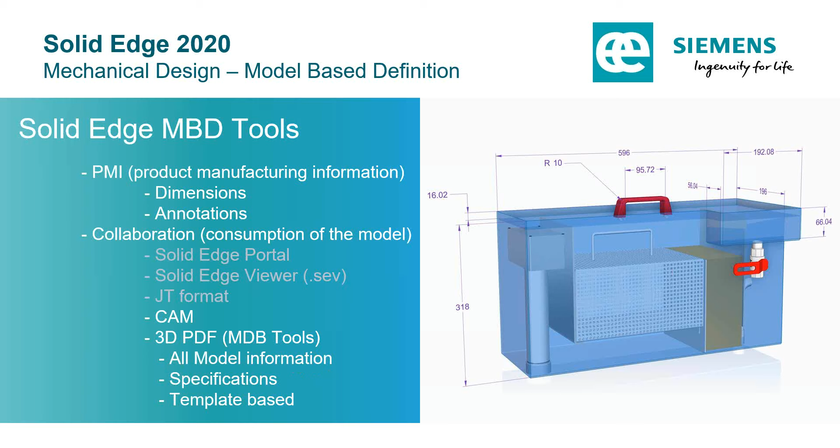So what is cloud collaboration? The Solid Edge portal stores and shares all sorts of file types and common CAD formats. It allows for viewing and marking up, as you can see on the slide here. It also allows augmented reality using various different devices, and you get free storage with it. This is included in Solid Edge.

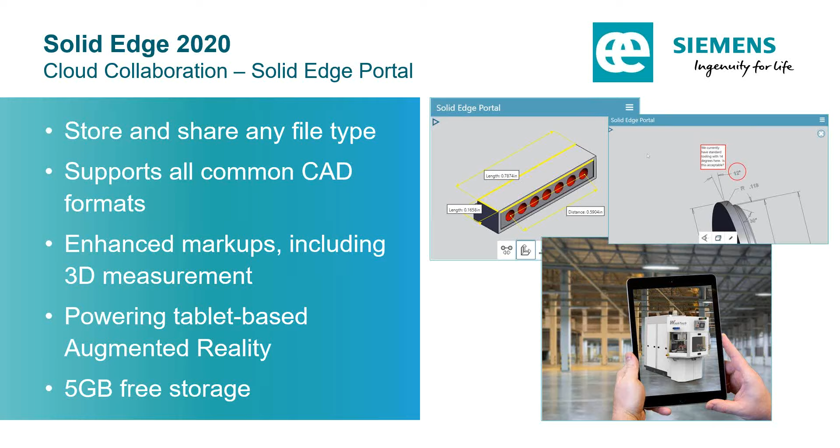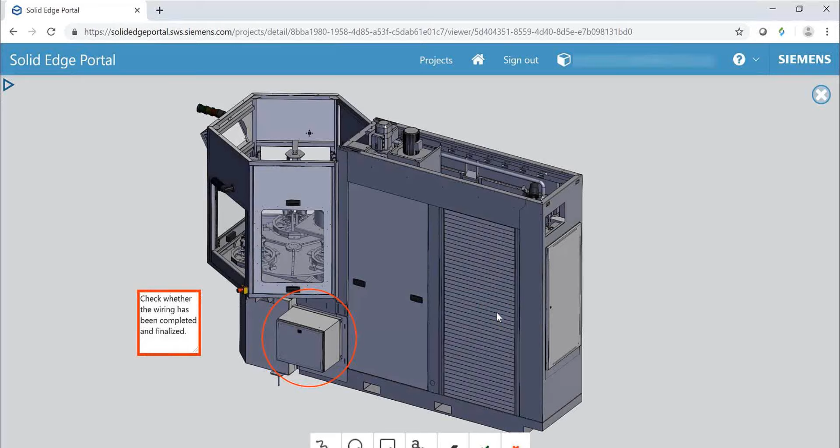This is a pre-recording of some things you can do in the Solid Edge portal. You can view your models, explode them, section them - all these typical model-based definition tools to allow visibility inside your model. You can also do your markups inside the Solid Edge portal. That's a very quick look at model-based definition using the Solid Edge portal, which includes measuring as well.

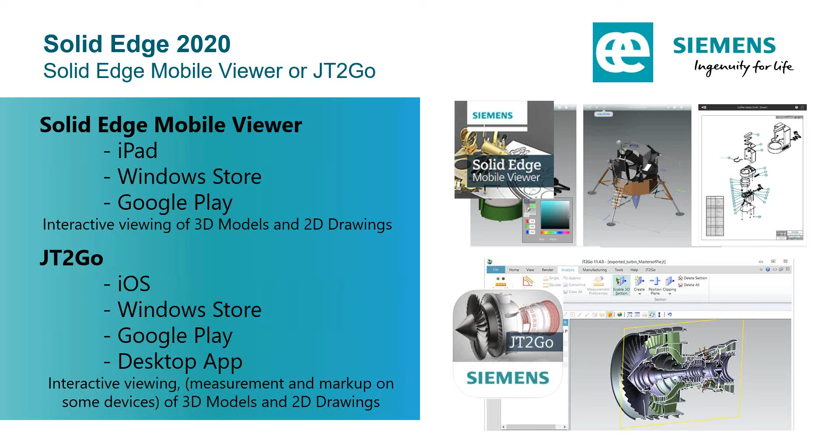Then you've got JT2Go. JT2Go works on iOS devices, Windows-based devices, including normal PCs. You can get JT2Go apps from the Windows Store, Google Play, and there are also downloadable and installable desktop apps. This allows for interactive viewing of 3D models and 2D drawings, as well as markup and measurement on some devices. So there's quite a few tools already out there for consumption of model-based definition.

So how do we actually generate the model-based definition information in Solid Edge? You can see on the screen here, in Solid Edge 2020, and also in 2021, we have enhanced PMI. This is basically bringing model-based product manufacturing information up to the level of the manufacturing information that is transmitted or put on normal 2D drawings. It's to allow full communication in the 3D environment.

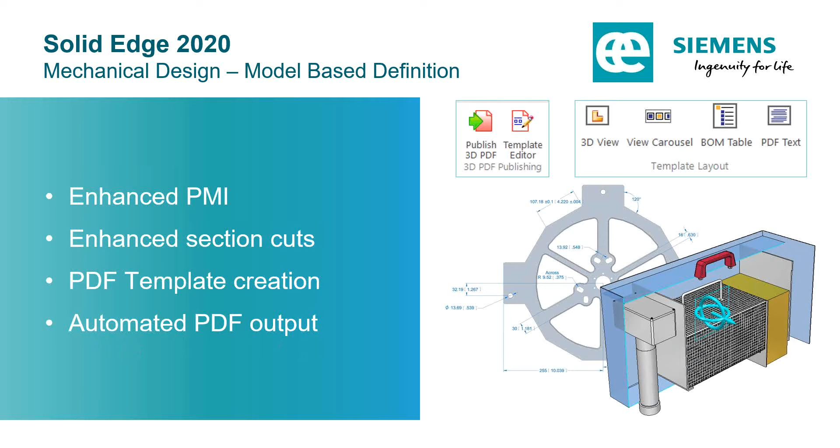You can do enhanced section cuts - we'll have a look at some of this in a little bit. We can use PDF template creation, we can actually create templates for our 3D PDFs, and then basically you have an ability to automate your PDF output. So let's take a look at this.

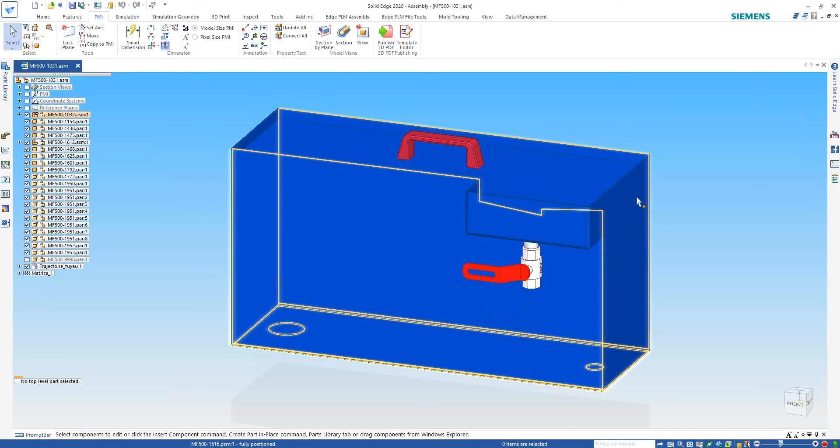I'll just switch over to Solid Edge now. We've got a model that is part of the WashTec data set from the Solid Edge launch. Now, it looks like a fairly basic system - there's a tap here, a couple of inlets, outlets. It's a fairly basic system that we're having a look at.

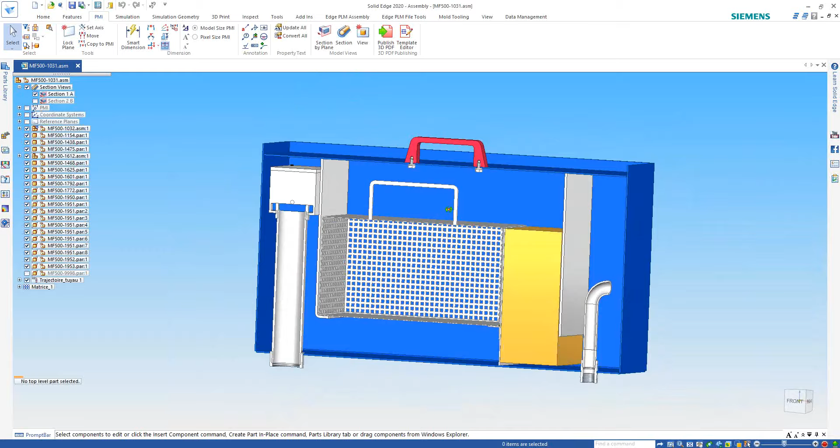It's got a couple of section views already stored in the model, and if I turn these on, you can see that it's a form of filtering system. There's one of the views, and we'll switch over to the next section view. And turn off the first one.

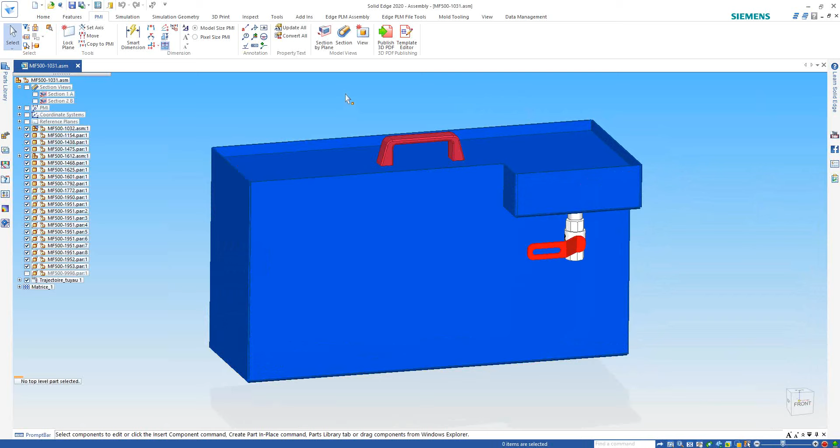You can see the kind of advanced section views you can create here. With sectioning, you have the ability to section by plane - simply select a plane, drag it up and down. You can just tap X, Y, or Z to change the plane you're cutting on. You can then move it in or out as needed, and rotate about any of the axes.

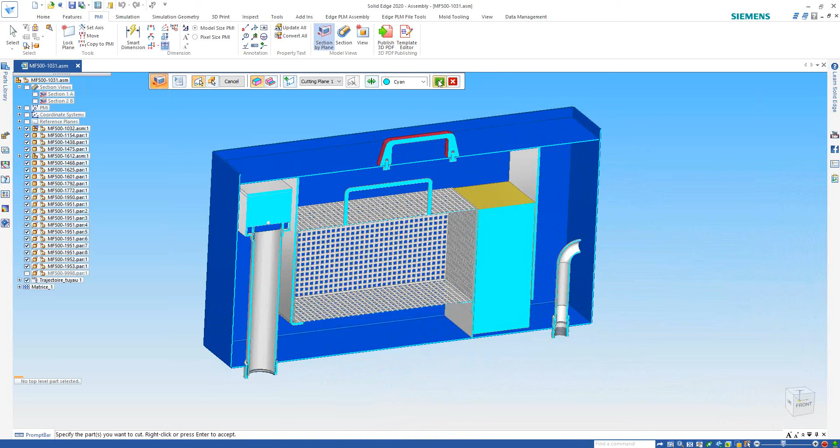I'll just go back to the Y, accept that - oops, sorry, didn't mean to accept that. You can also add additional cutting planes. I'll flip this one, rotate it a little bit, and drag it up to give me a look through or into the top of that filter box area as well.

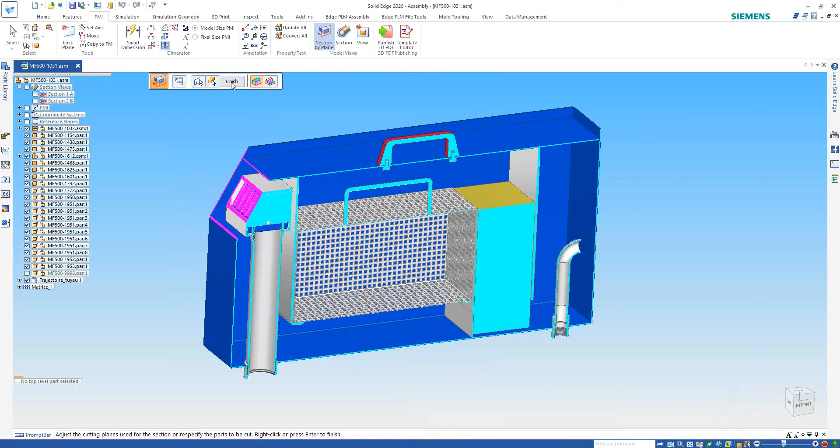So you see you've got various tools, and these section by plane tools are very, very useful for creating quick, detailed section views for communicating your information.

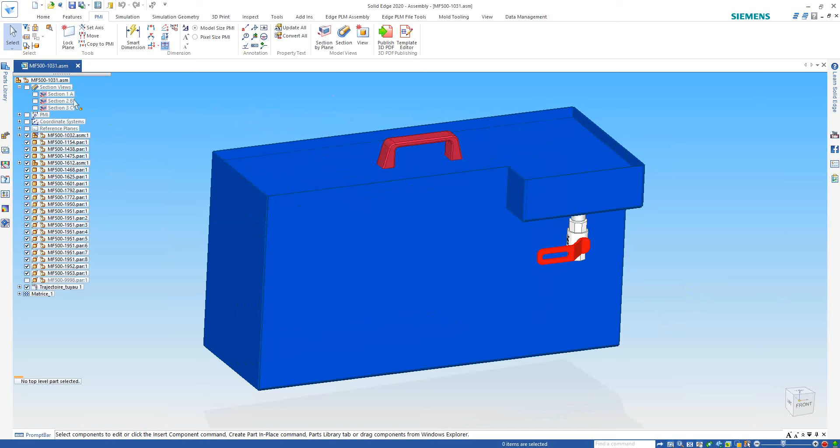Now, what else do we typically have in model-based definition? Well, we normally have product manufacturing information. You can see here I've got various product manufacturing dimensions, clearances, annotations, including torque settings, things like that. But how do we actually utilize all of these?

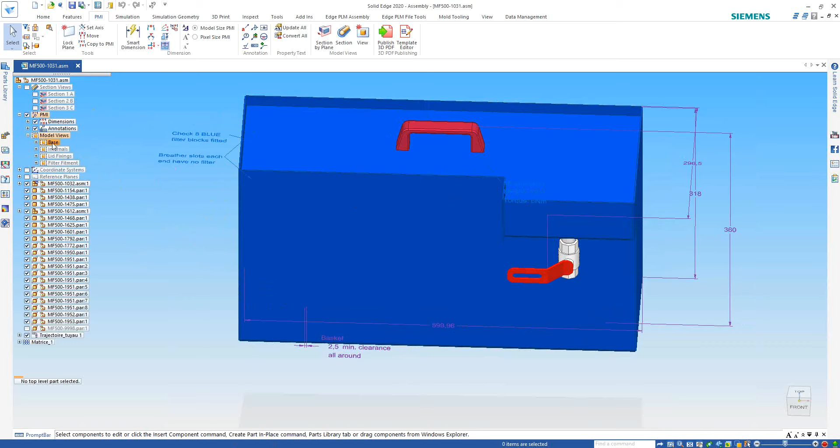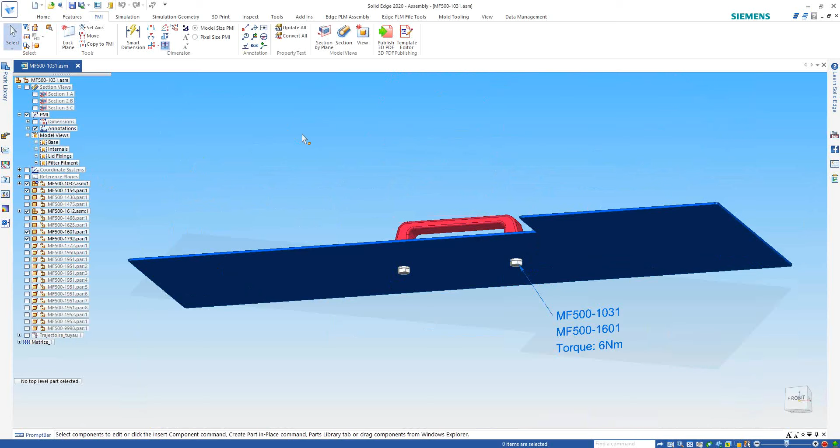Well, in the product manufacturing information, you can see I've got dimensions, annotations, but I've also got model views. If I apply one of these views, you can see it controls what dimensions and annotations are displayed, and it also controls what parts are shown and hidden. So you can generate numerous different views to express how your product is to be manufactured.

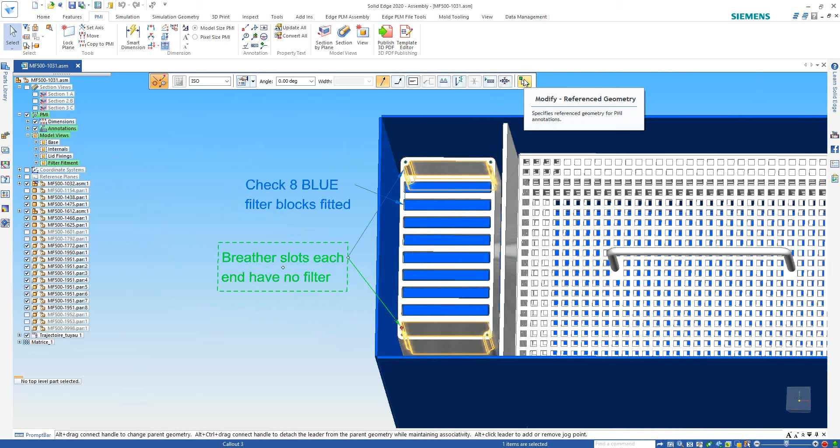One of the nice things about this is if I click on my annotations, you can see that it highlights the areas that are to do with that particular annotation. And I can add additional geometry in there if I want - I don't in this case. So I've got quite a bit of ability to show what I'm talking about with these annotations. That's all good - we can create model views using the view command.

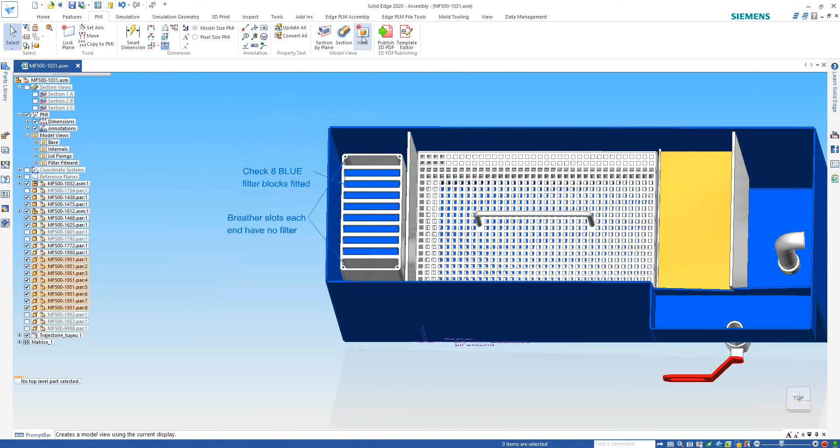Basically, you set up with the PMI annotations and parts shown or hidden that you want, and then you simply create a view and give it the appropriate name. So what do we do with all of this information? How do we get it to the customer? Well, we have a published 3D PDF.

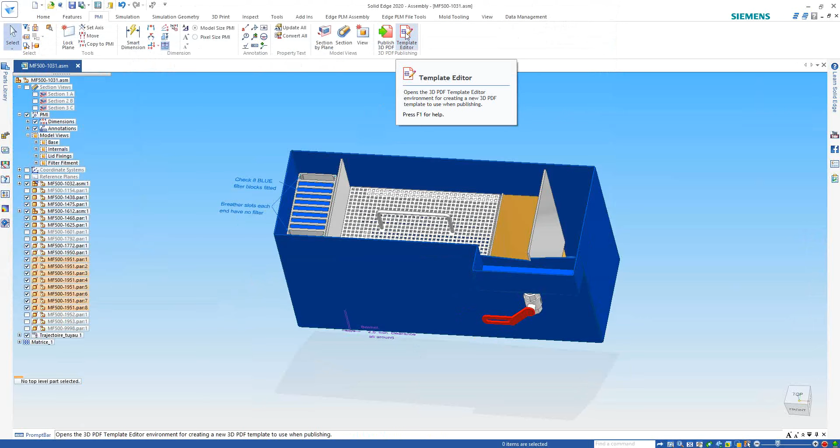Now, you might think, well, that's all good, but I could have saved as translated a long time ago, and you'll notice that I have 3D PDF documents there. That is true. However, this takes it to the next level, and the way it does that is it has the ability to generate these PDFs according to a template.

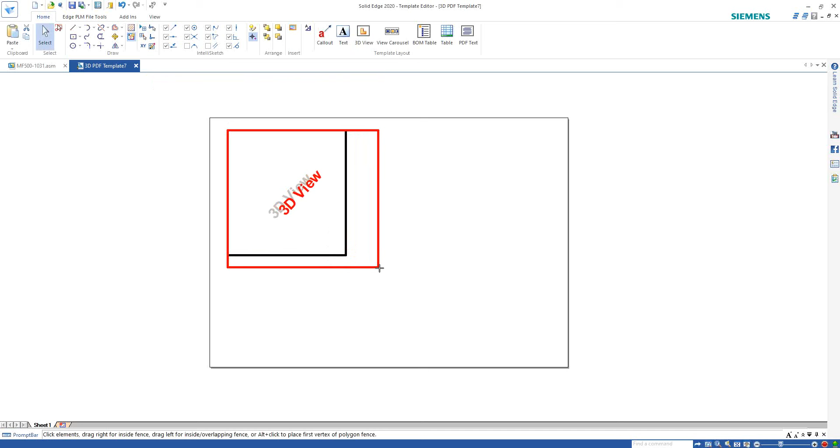I'll just click on the template editor, and you'll notice it basically starts with a blank page, but it has all of these options. What are these options? Well, I might place a 3D view of my part. Now, this is a 3D view of the model itself.

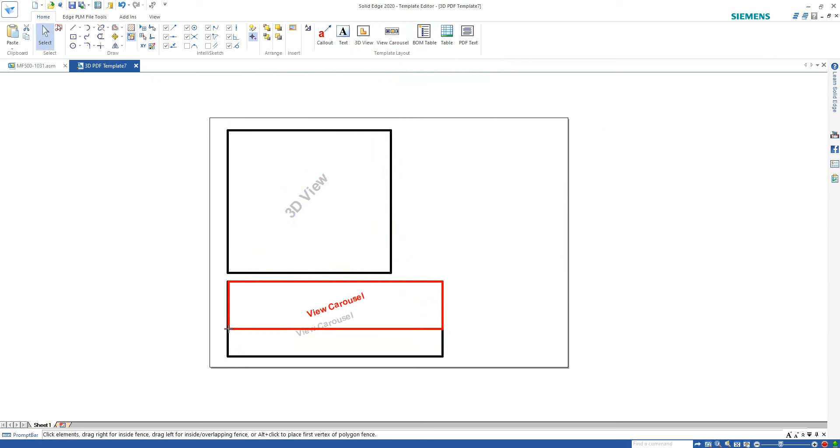I might want to add a view carousel to the bottom of that. You saw all of those model views I created - the view carousel is a way to basically navigate between all of the different views that you have created. So we can set these up, we can size them as desired. I might bring that over to that size.

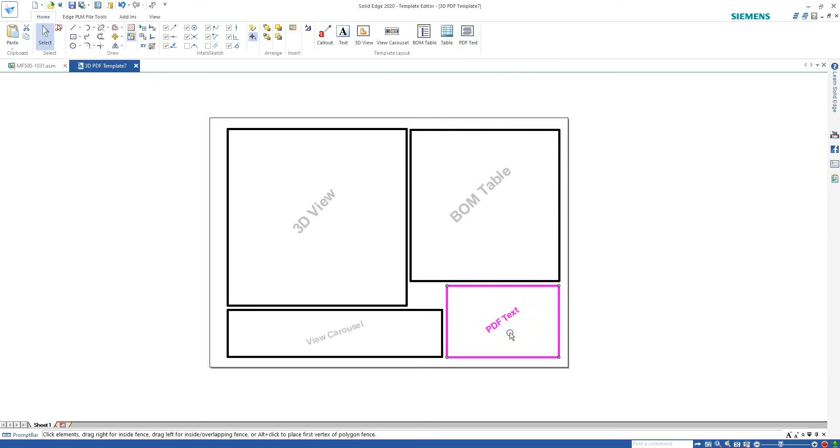I'll add a bill of materials table as well. Now, that might be a little bit too big. You can set up the bill of materials and how you want it laid out. I can also add document specifications or whatever I choose to. Now, with these PDF texts, I can actually add information as desired into this PDF text. And then I've got all of my other normal tools.

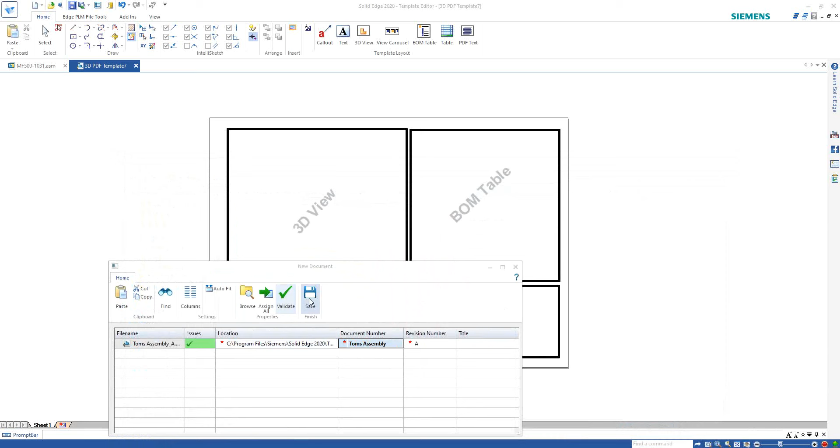So once I've done all of that, I save that, typically in my Siemens folder, Solid Edge, Templates, 3D PDF Publish - okay, that's my folder. And I want this to be Tom's assembly template. Okay, I'll just call it Tom's assembly. Validate - no, there's no other documents by that name. Save that as my template.

All right, so now I've got a 3D PDF template. What do I do with that? Well, when I choose to publish this document as 3D PDF for model-based definition, the first thing it says is, what template are you going to use? You'll notice that Tom's assembly is there. Now, some of these other templates are set up a little bit nicer, so I won't use that one in particular. But for example, I'll use an assembly landscape template at this point.

I'll publish it to a model-based definition published folder, and I'll give it that name. Notice all of the PMI model views. I can choose to select all of them or just some of those views to be put into this 3D PDF. I can open up the document in the PDF viewer after I've created it. I can add the custom file properties to the PDF document. This is a nice one here.

I can publish an HTML version of this 3D PDF, particularly useful if you're not intending to distribute this data by PDF files, but if you want to add it to a website or something like that. And I'll add the next and previous action buttons in the PDF as well.

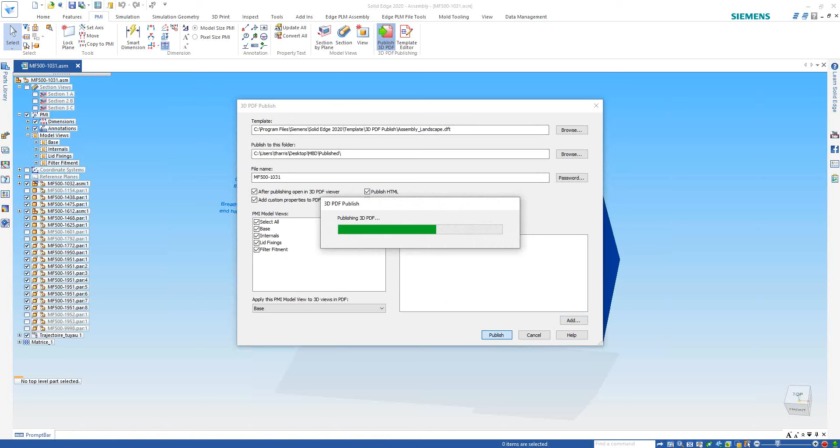So it takes a couple of minutes, yes, but normally not a couple of minutes, normally about a minute all up, and then it finishes and you've got a single source definition. At the moment, it's publishing the 3D PDF. It is a lot quicker if you don't publish to HTML, which I have done, but I wanted to also show you the HTML definition that you end up with.

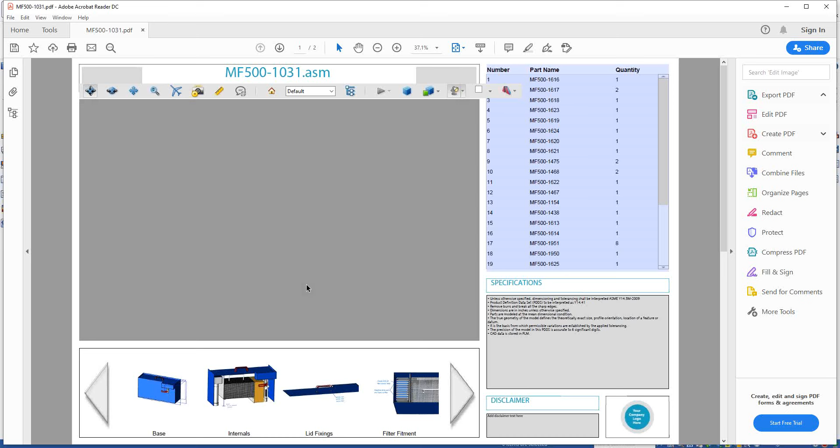I'm just going to bring my model down here. You can see that it's actually just finished creating the PDF and the HTML file. Let's have a look at that. As you can see, this is already quite different to your typical 3D PDF. Number one, it's all laid out with headings and tables. I'm not sure if you can see that - let me zoom in a little bit more. I just want to show you the specification table.

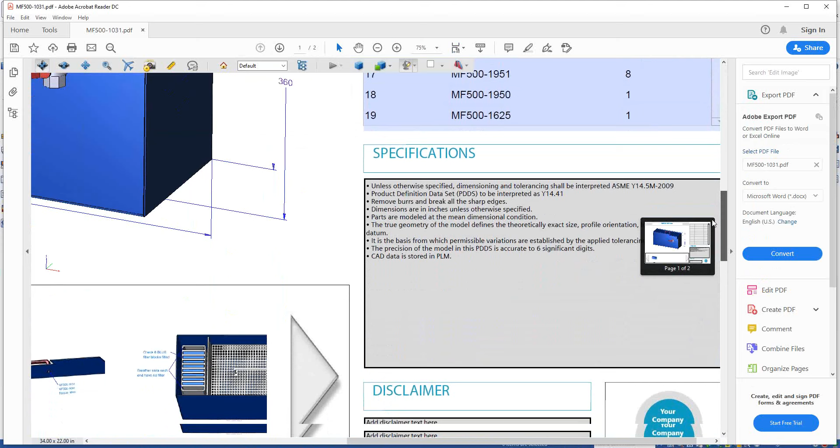I should have made that a little bit larger. All of your manufacturing information is there. You can add disclaimers, company logos. Let me go back to full page.

All of the information - you can have manufacturing notes, dimensions, tolerances.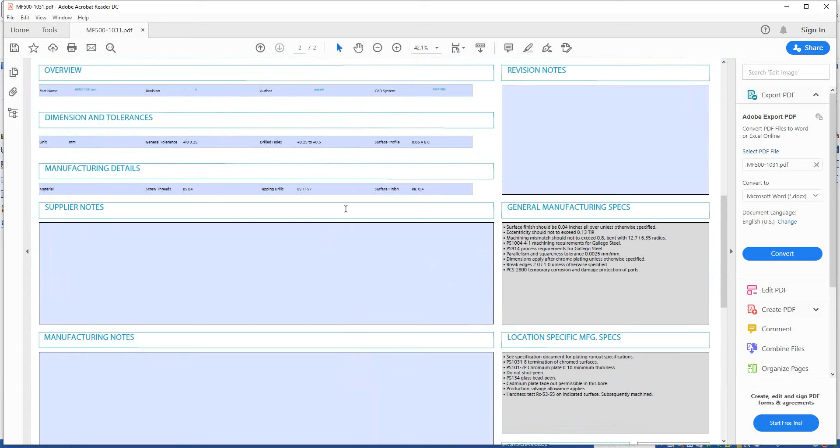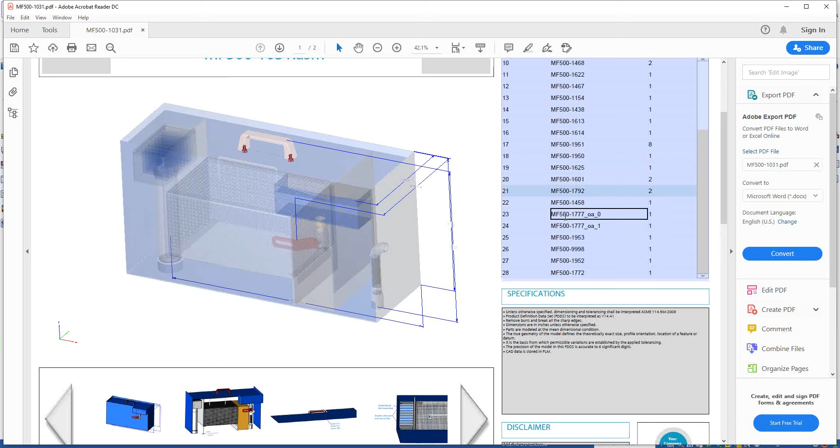Coming back to the main page, you can see my model is easily rotatable and spinnable. If I click on a part, it highlights the part in the tree as well as in the BOM. I can click through the BOM and it's all completely interactive, two-way interactive, so that part is highlighted there.

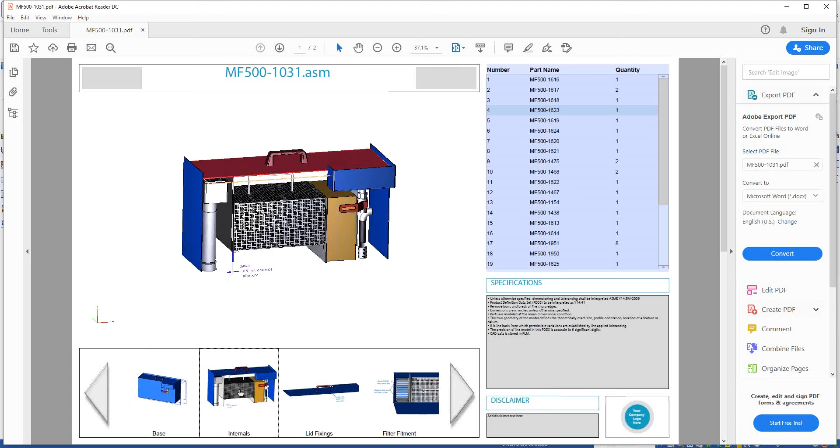Let me zoom out a bit more so you can see it all. Here's my view carousel. The base view is what we started with - remember how I'd set up all of these views. I've got the internal view, I've got the lid fixings, and there's the bolt and washer and all of the torque information in this case.

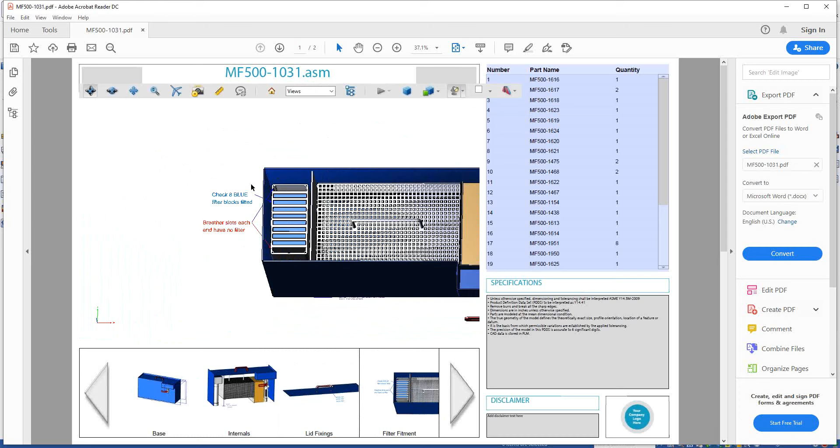I have my filter fitment information, all of the particular manufacturing information, and then my typical views. So we've got a lot of information here for how to manufacture this particular assembly. Okay, close that - let's have a look at the actual HTML.

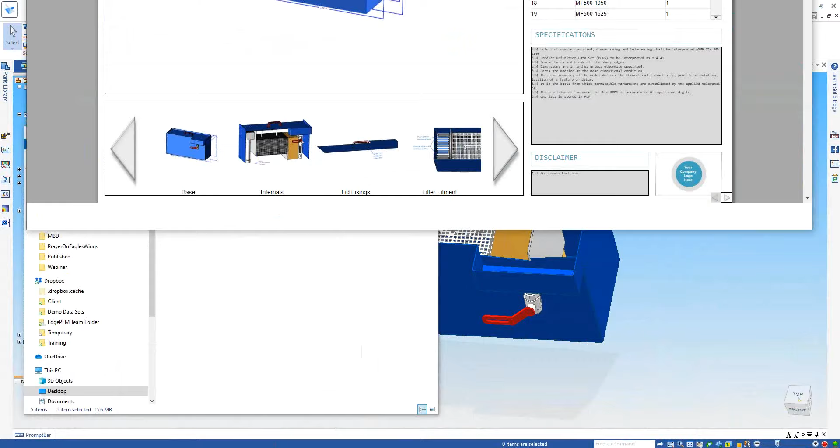I'll just drag this window down. Notice in HTML, pretty much all the same functionality - zoom in, zoom out, select and it highlights, select there and it highlights. So it's two-way highlighting, and all of my carousel information is there.

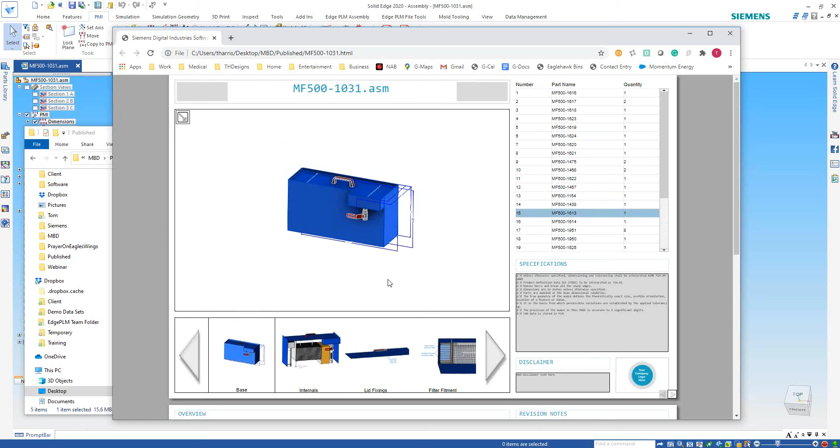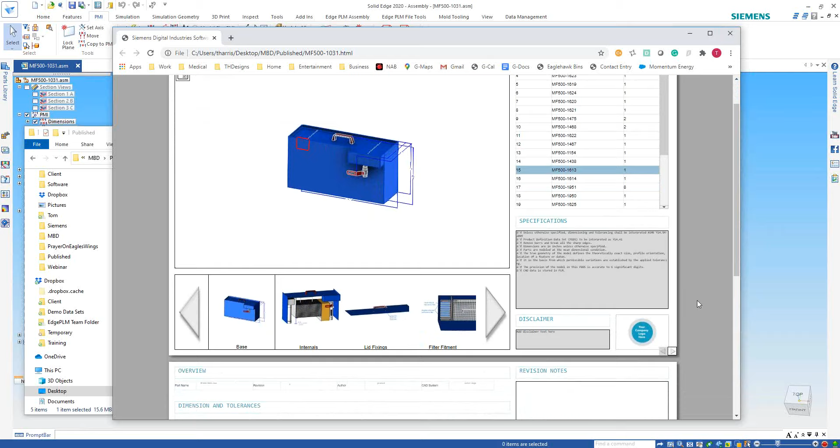If I want to go into the tree - I should have shown you this on the PDF as well, you can do this in the PDF - all the information, properties and so on for each of the parts in the assembly. So it's quite a comprehensive document that you can create using this.

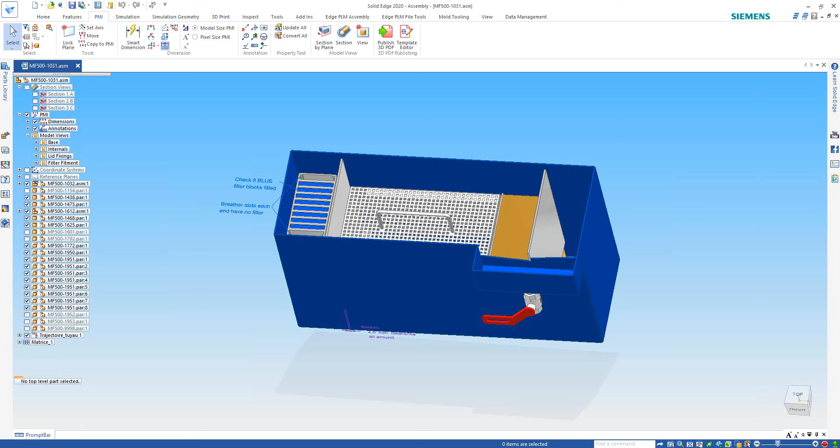However, at the moment you've only seen a 3D assembly, so what about grabbing other types of data? I'll quickly open up a part so you can see that kind of manufacturing information. This is where you start needing datum targets and specific feature information in order to enable proper manufacturing.

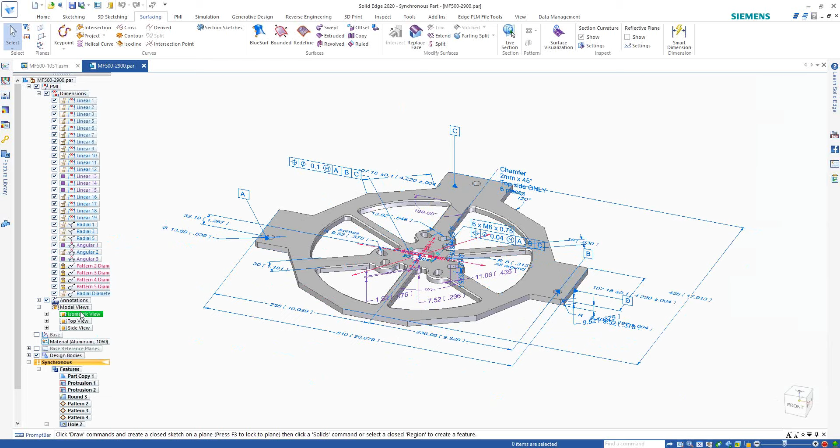You can see I've got a few different views here and quite a lot of product manufacturing information for this particular part. This is where your views are particularly useful, because you set up views depending on the information you need to show in that view. Okay, so all of this is set up, ready to go.

How do I again get the model information out? Well, I go to my PMI tab again. I could use the template editor if I didn't have one already, or in this case I'll use 3D Publish. Again, I don't want an assembly landscape, I want a part landscape this time.

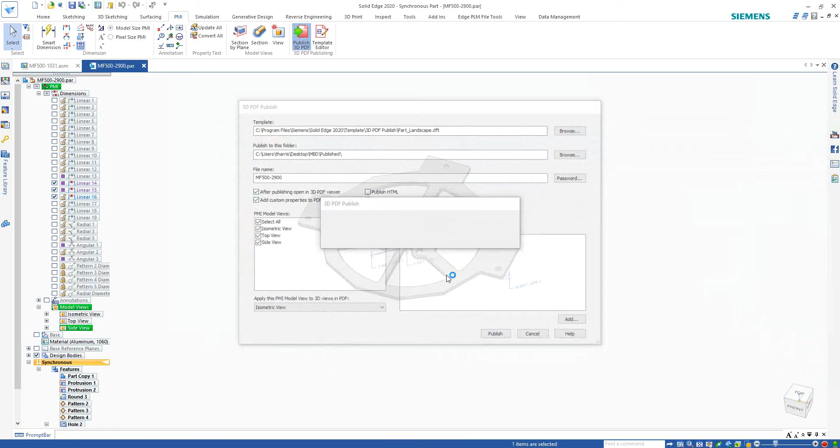Slightly different template - give it that name. I won't publish the HTML this time, to make it a bit quicker, and I will publish that. It grabs the model data, generates the attachments, and quickly drops out the step file. There it is.

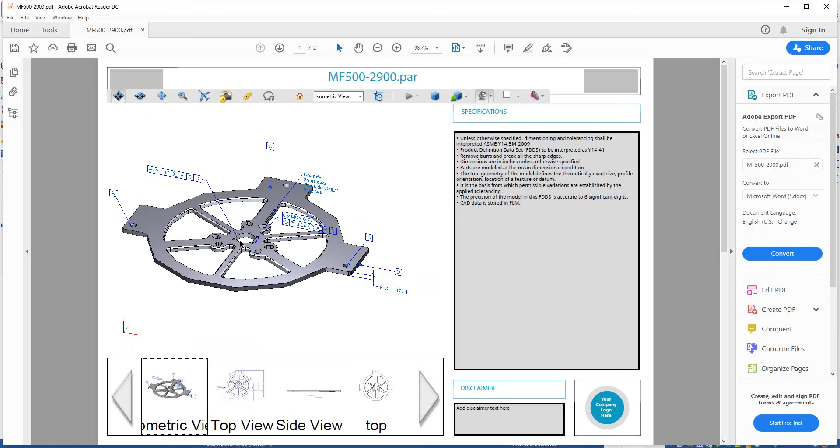You can see I've got my views showing the manufacturing information in the particular orientations that make sense for the view. Now I'll just move that over. I can come over here to the model tree - notice I've got all my PMI information and all of that kind of stuff. I can turn on or off any of that at will.

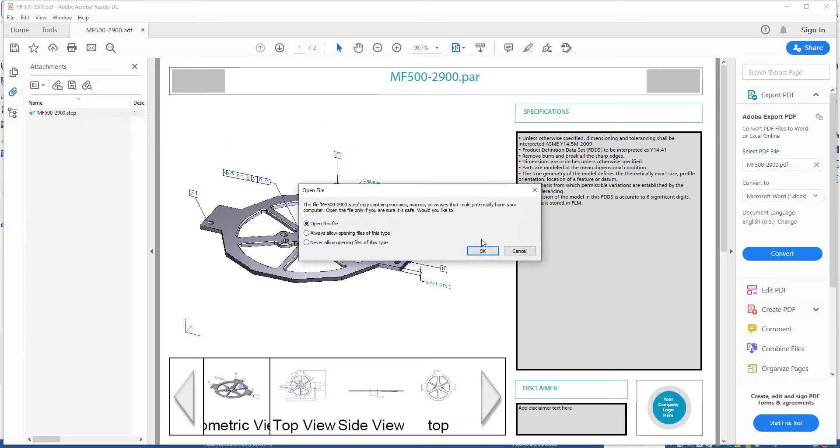I've also got the attachments file - now here we have a step file. Okay, I'm going to open that step file, I will open it here. It fires up Solid Edge, opens the step file - but what I want is to bring it into the part environment.

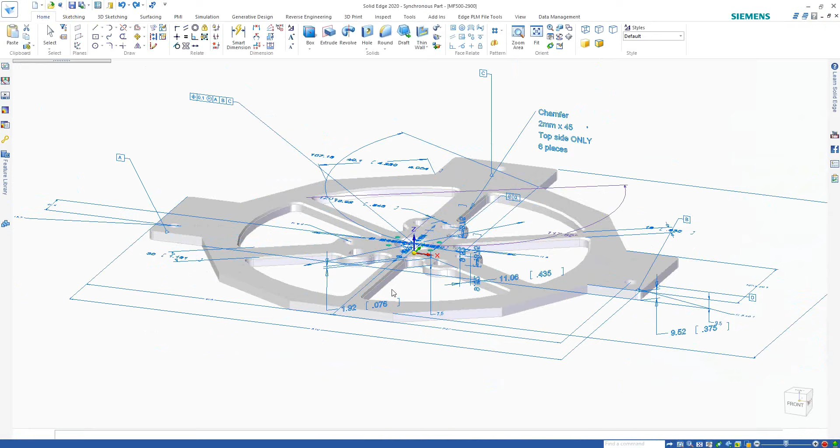What you'll notice here is that it should have all of the 3D PMI right there, and you can see all of that. Now, how do we make sure it's got the 3D PMI? Well, first I'll just close down this instance of Solid Edge because it opened up a new one.

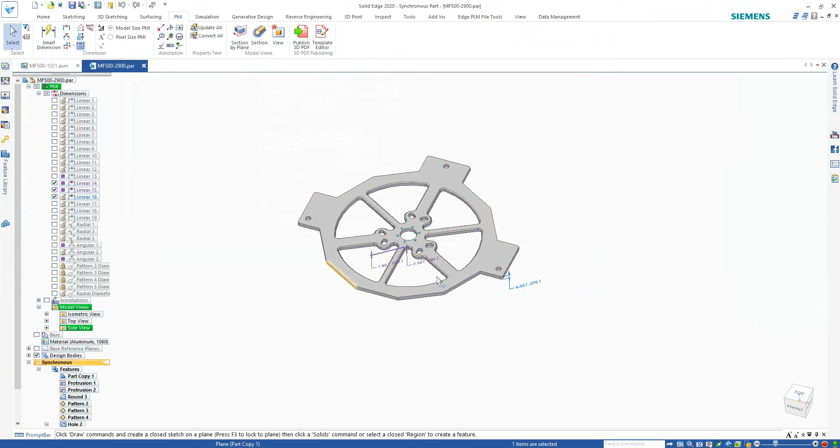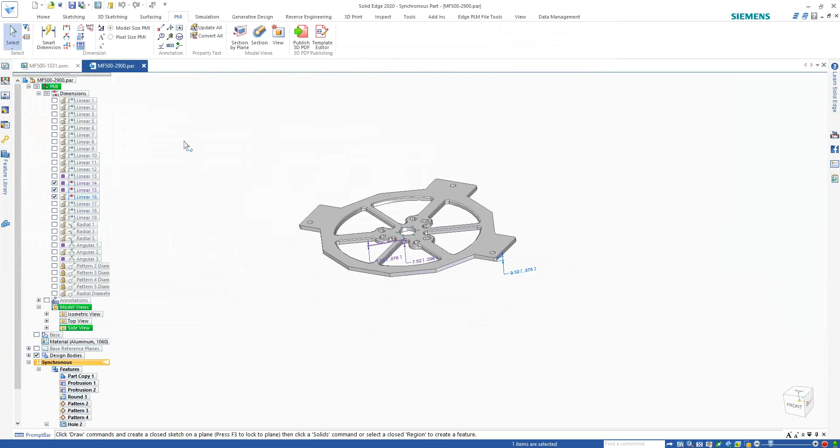So if I grab a step file and select options, notice I've selected to import PMI. Now, if you don't have both of them set, then the step file in the 3D PDF may have the PMI, but if you don't import it, you won't see it. If you don't export it, then the step file in the 3D PDF will not have the PMI attached, which means your machines that can read 3D PMI will not have it attached either.

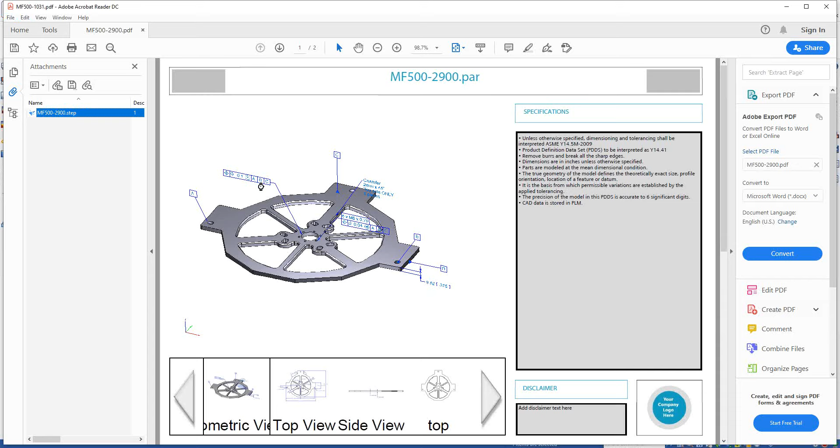So that's a really quick preview of the types of information you can transmit in the 3D PDF environment. Now I just want to quickly open up one of the previous models we looked at before, and the assembly. There we go. I want to show you another function.

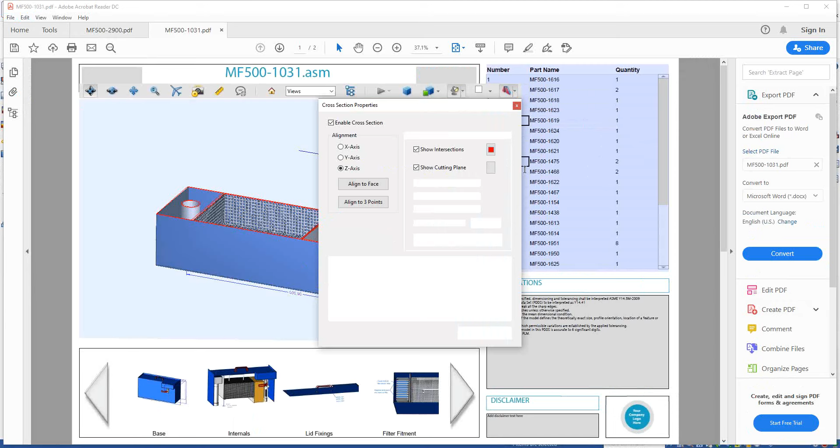At the moment, the section views in Solid Edge don't come across as section views in 3D PDF. However, that's not so much of a problem because the 3D PDF has the ability to do section views as well. I'm going to flip that. You can see how you can very, very easily generate your 3D PDF section views, and it's got all sorts of options, like adding section caps, for example.

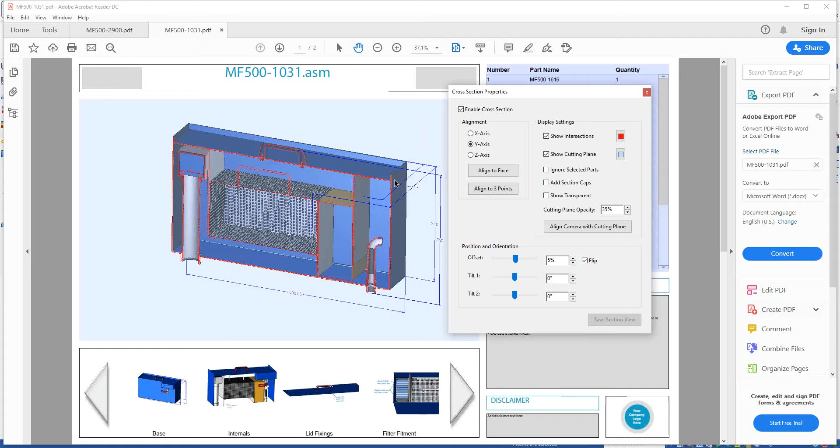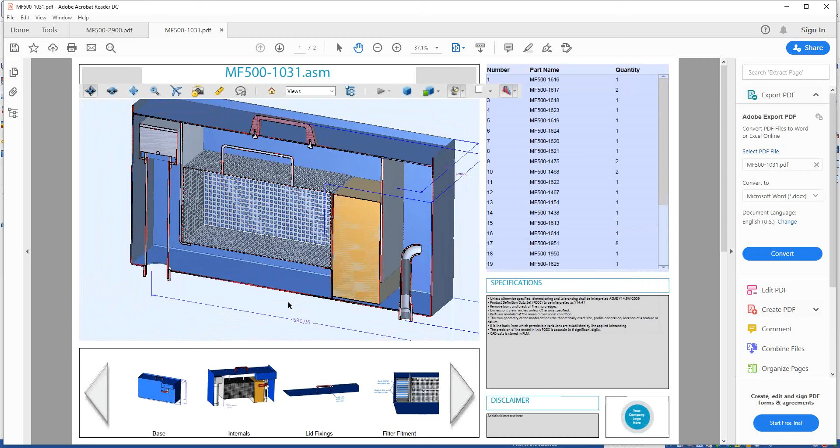At the moment, it just cuts. If I add my section cap, it makes it look a little bit more like your typical Solid Edge section view. So just because the specific PMI section views don't come across doesn't mean you can't do that functionality in the 3D PDF environment. All of the functionality is still there.

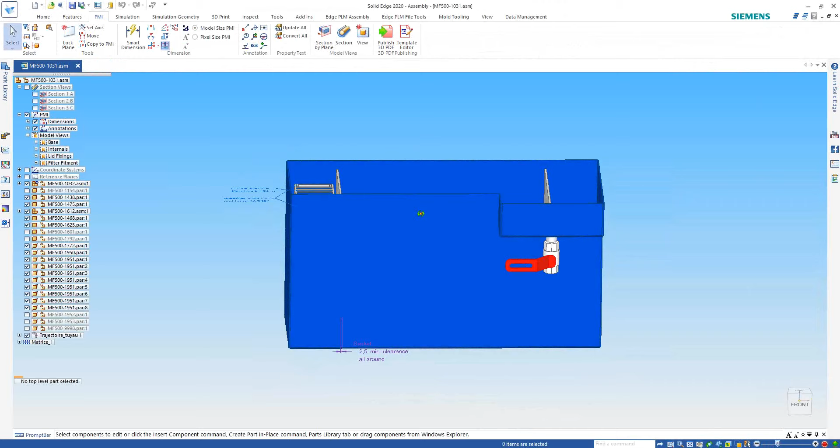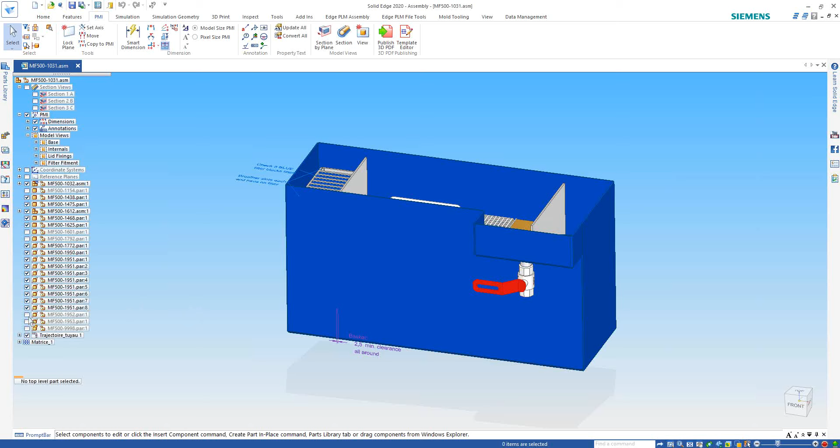There is a little bit more, however, that we still haven't quite looked at. This is if I need to create nice animations and things like that - I might want to create a really, really fancy animation of this component. Now, we all know Solid Edge is linked heavily with KeyShot, and I'm just going to view my base again. You'll notice there's a part here, and you might have seen it in some of the 3D PDFs.

What this part is for is this is actually what we would refer to as a sectioning part. KeyShot has the ability to section views with a part. Now, how do we actually set that up in Solid Edge so that we can display those movies to carry the information through? Well, what we want to do is create a linear motor on this part.

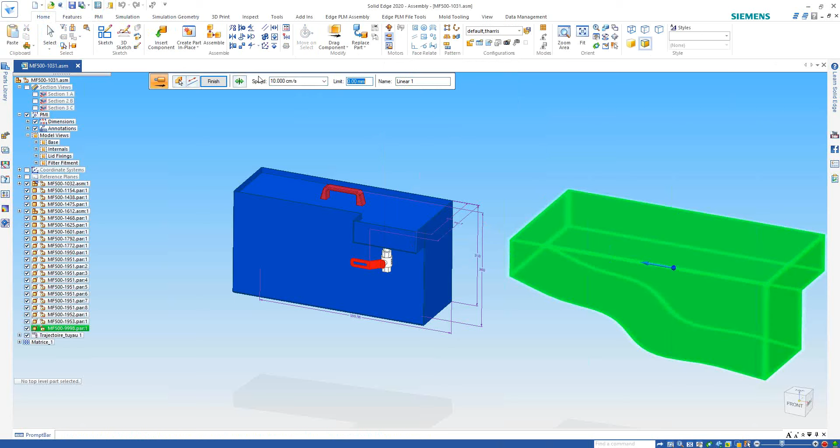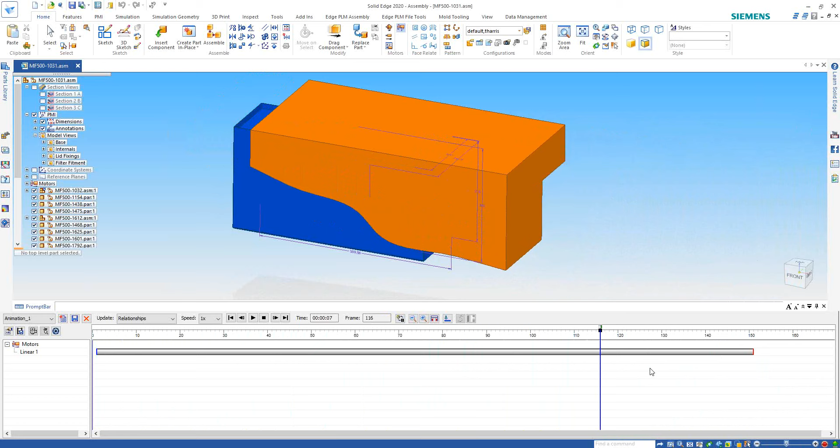I'll say 10 centimeters per second. Hopefully that'll be right, we'll see how we go. Now I want to simulate that motor - I'll do 10 seconds, yes. You can see how the part is basically going all the way through as we get there. So what we now want to do is animate this particular model in KeyShot.

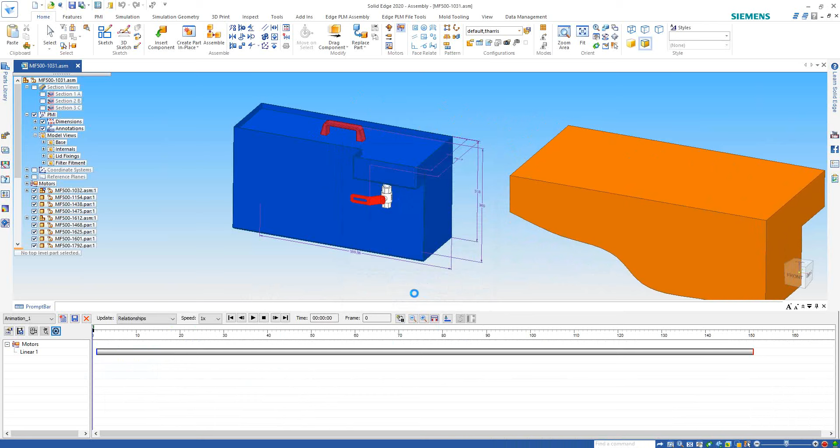So I click KeyShot Animate. I can select whatever quality I want - I'll accept that at the moment. Say OK. It then generates the KeyShot BIP file, opens KeyShot, and brings us into the file. Now, at the moment, you can see this part, which is not really what we want.

However, you'll notice in the KeyShot materials, there's a material type called a cutaway. You can have various different types of cutaways - red capped cutaways, which would be very similar to what we just saw in 3D PDF, cross hatches, double lines, all these different types. I'm just going to go with a red cap section cutaway.